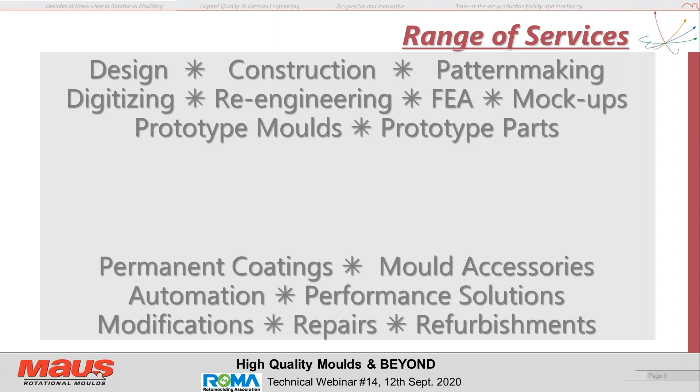But of course, our main focus relies on the actual mold making, and here we have all sorts of possibilities. We make the molds from aluminium, either CNC machined or cast, but also fabricated aluminium sheet or steel sheet, but also galvano molds. So nowadays we can say we can offer all common mold types which are used in rotomolding.

So as said, we have galvano molds, we have the sheet metal molds, we have traditional cast molds, but we also have the so-called fast cast process, which we developed ourselves, and the CNC machined molds. But we can also combine different parts of these in one mold, and then we actually speak of a hybrid mold, where we use different processes to always get the best for the mold.

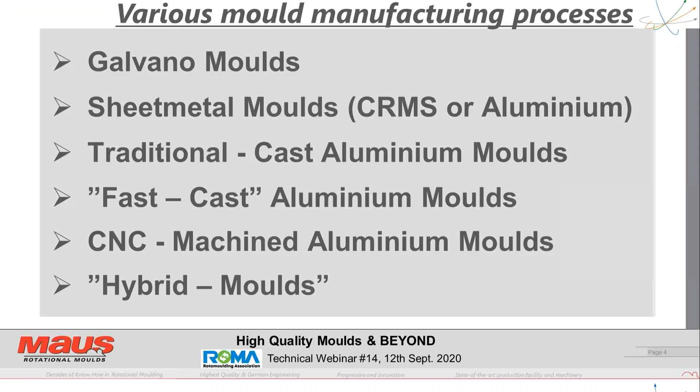It is also quite important to consider the different types of molds we are producing. So we cannot only produce standard serial molds, but we also produce and lay out molds as so-called prototype molds if you would not need as many predicted numbers. But we can also have semi and fully automated molds. Certainly we produce combination molds, robo molds, but also molds that are heated by infrared, or even molds which are heated by an oil jacket. So it's different types of molds.

When we speak of a high quality mold, when we consider the mold as such, there are certain components that almost every rotation mold would feature. Here we see a very old picture of a children's lamp, a famous character in Germany. I think that mold is almost 25 years old, but it still has the basic components.

We do have the mold shells. We do have mold flanges. We do have centerings or dowels for having the right orientation on the flanges. Typically, a mold would feature a mold frame, and you would also find some elements of fastening or clamps to actually keep the mold shells together. And you would have most likely a breather or vent inside the mold.

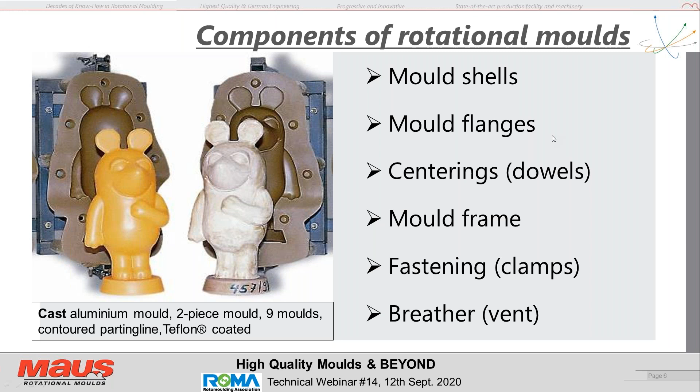So when we look at those things, it is for us very, very important to look at the first part, the mold shells. If the mold shells are not good, or in other words, if you have a bad mold, it's pretty damn hard to produce a good plastic part. So it's most important to look at the mold shells, which would require very good heat transfer, as you want to get the heat in as quickly as possible.

But it also should have even wall thickness to get a good result. You would also want to have the mold shells be very uniform, as every thickening of the mold shell, every non-uniformity on the mold shell, would also give you a different wall thickness on the product.

It is the metal quality which is very important. It's the rigidity - you want to have a mold which is not becoming brittle. You would not like to see stresses being included in the mold shells. You should ask for a certain quality surface finish possibility on the mold shells. Depending on the parts you produce, there should be also a certain accuracy involved in the mold shells, so they should be spot on in terms of the dimensions you want to achieve.

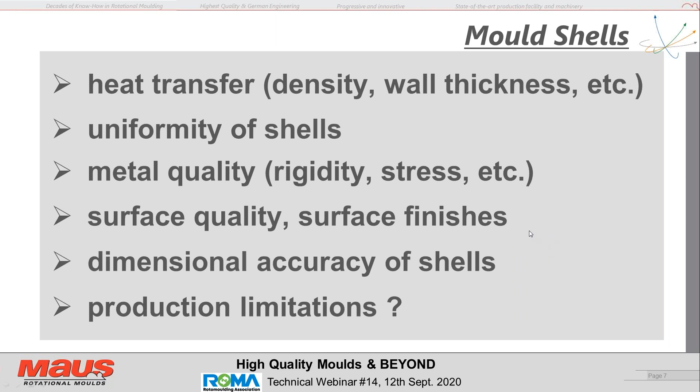But you would also have to consider what limitations there would be in terms of the mold shell production. So those are all questions to find the right mold shells. Let me just introduce a little bit of the different processes we have to actually produce those mold shells.

Starting off with the famous KelchCast process, which was developed especially for rotation molds. What is outstanding here, it is an aluminum casting process, but unlike any other process, it is actually designed for making rotational molds. So what was most important for us is to have a way that we can produce mold shells which have only a 7mm consistent wall thickness. And that is really very outstanding and very important.

Nowadays, you can find many people CNC machining molds with 7mm, but why is it that all cast molds typically are a lot thicker than 7mm? Because it's technically quite difficult to achieve this thin wall thickness. But it's very important to keep the mold as thin as possible to get very quick and good heat conductivity or heat transfer into the mold.

With that process, it's also possible to cast in undercuts. We do not need any demolding drafts. We can have fine surface structures. So as said, it is specially designed for the needs of rotational molds, and that casting process you can only find with us in Germany and our partner Norstar in the US.

accelerating the heat transfer. So you can see the product being highly loaded with structures. You can see in the middle the final product, which is actually gold plated and painted, so quite an ornamental part. Only these fine structures are possible with this KelchCast process.

But since we always need a positive model for the KelchCast process, which takes time and cost, we put significant effort into developing a faster cast process, where we try to skip the positive and negative models and go straight to the casting molds.

So here we are CNC machining our casting molds. Again, the casting molds are formed from sand and ceramics, so we're CNC machining the sand and the ceramic. We skip the positive models, we skip the negatives, but we need more CAD engineering to model up those needed mold shells to then CNC machine the casting molds and do the casting.

So with this process, we have no compromise in quality and accuracy of the casting, and we can speed up processing quite a bit, and at the same time drop the cost for materials.

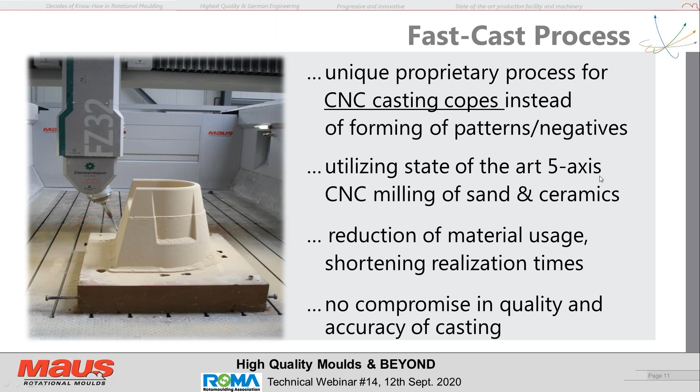But also to get the best features on the molds, we actually have our foundry building humidity controlled. Every melt we produce every day is checked with a computer system to ensure that we always cast in the same environment, but also achieve the highest possible quality of the melt we produce every day.

Plus, we only work with 100% virgin material, so we are not recycling our material, as this would reduce the quality and the longevity of the mold.

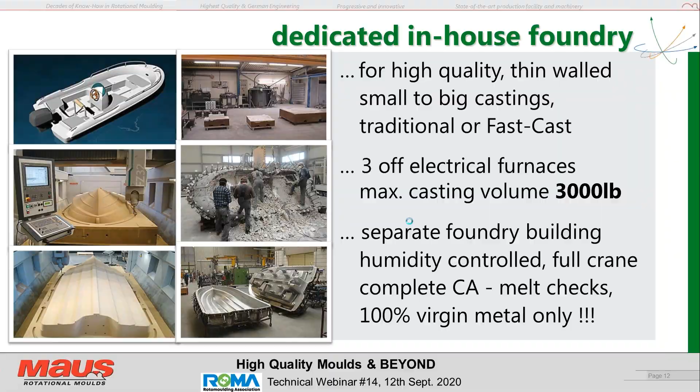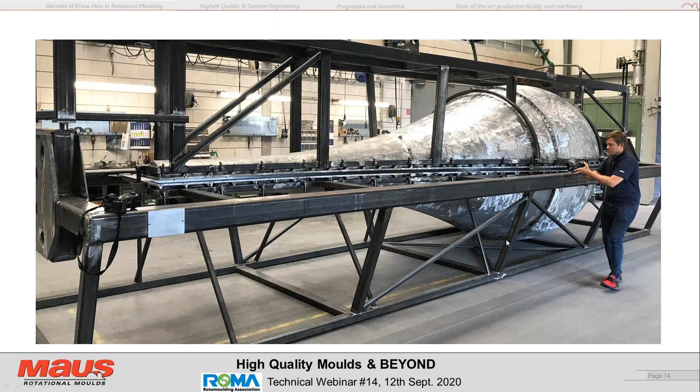We also make CNC machined molds for the mold shells. This is more ideal if we talk about flat or shallow mold shells, as we don't have to cut that much material. There is the limitation that the machine heads need to be able to get into the contours. Other than that, there is not much of a limitation.

This will give you the highest dimensional accuracy if being done right and if the machine heads and cutters are good. But it can give you the best quality.

Just a recycled slide from another presentation to give you some idea.

Nowadays we have 22 CAD/CAM workstations where we do programming. We have 10 high-speed cutting CNC machines with a maximum dimension of 6 meters by 3 meters and 1 meter 60 in Z, so obviously big enough for the largest jobs out there.

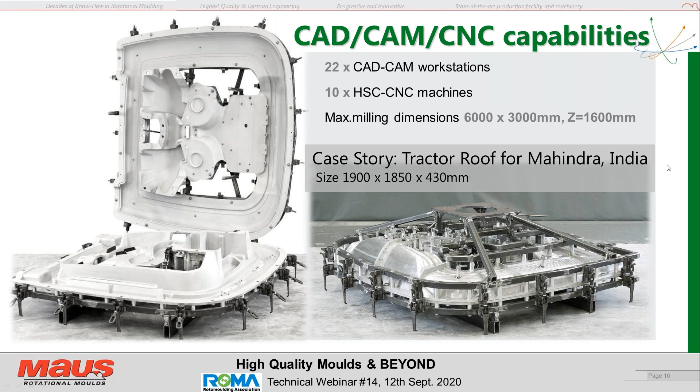As on the example picture you see here, that was a tractor roof for Mahindra, being actually cut from 4 pieces to speed up timing, and that mold was produced in as quick as 5.5 weeks from date of order. So it can be quite a speedy process.

The thing is, you actually have to pay for the full material to then end up with only 700-800 kilos of mold shells. So there's a lot of waste, which makes CNC machining of such deep and large pieces quite costly. Therefore we always think about what is the best way to go: is it CNC machining, is it casting?

Many times you will find a hybrid will give you the best features, as you can CNC machine the flat pieces and cast the deeper pieces and put them together just as you wish. That is a picture of the finalized CNC cut mold.

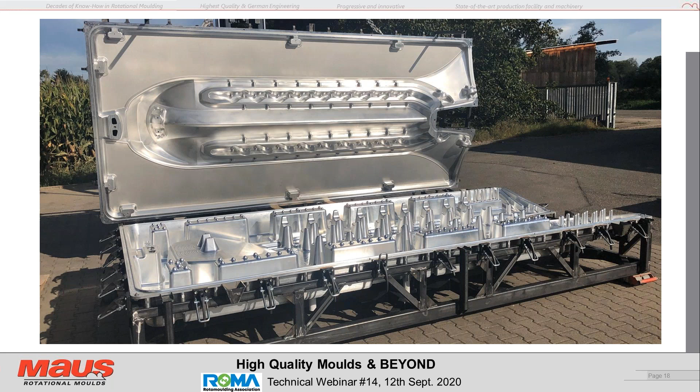So now we talked a little bit about the mold shells. Next on the topic is the mold flanges. Of course it's important to consider the right dimensions and the strength of the flanges, because this is holding the mold together. So you don't want to have this too weak, but you should also not make it too thick, as then you would have a heat sink.

The meeting of the flanges could be machined from the CNC machine or blued together with an engineering sealant. You want to have the mold flanges set up in such a way that you don't have too much offset or distortion.

You need to design the mold flanges in a way that they can be as tight as possible, so you don't have leakages on the mold. In some cases, you could also consider implementing sealing gaskets into the mold flanges to actually avoid material dripping out of the mold, but also to minimize trimming work on the molds.

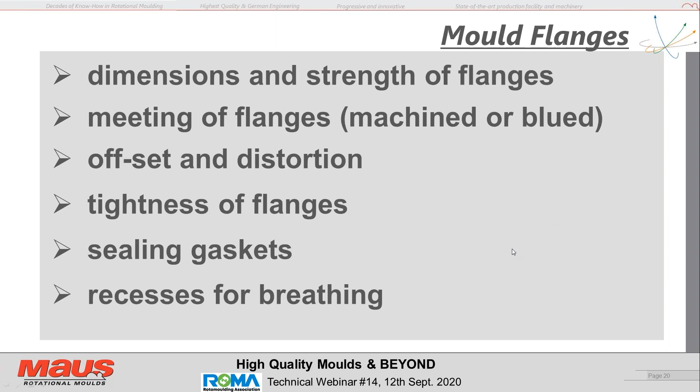On many molds, we actually design in recesses on the flanges to enable the breathing of the air, which is encapsulated between the mold flanges, to the outside, rather than creating bubbles along the parting line on the plastic products. Here's an example of that - a mold where you can nicely see, in this case, a cast-in omega shaped groove on the mold parting line.

That is the groove here, where we could then easily put a silicone gasket in there to have a sealing gasket for the mold, which is helping to have this quite nicely sealed.

That is just a picture from a refurbished mold, but here you can actually see quite nicely what I mean with a recessed flange. So we actually only have 10 millimeters inside the mold surface as a meeting face, but we have machined out or cast out a little recess to the outside.

Therefore we have the clamping force right to the inner side of the mold, versus the outside is nicely opened up, and all the air will stream to the outside. If the mold is heating up and air is expanding, now the air will escape to the outside. So that is helping you to make better products.

We could also have much more complicated so-called dispersed flanges. Typically a flange meets face to face, flat on each other, which is always creating a heat sink, which typically you can see if you cut the product - you will have differences in the wall thicknesses in the areas of the mold flanges.

If I talk about dispersed flanges, then we don't have the flanges meeting face on face. This is actually a liner for the aerospace industry, and they were most critical on having as homogeneous a wall thickness on the product as possible. So we have set off the flanges. You can see this better on the next picture.

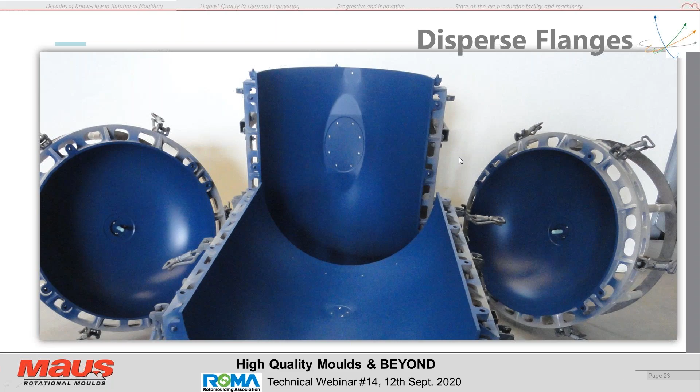If you look at the picture on the right, we don't have the flanges meeting face on face, but they are actually ribbed with little pockets, so the air can stream everywhere. We have no thickenings. We still have a good meeting point on the mold shells, but the flanges are actually separated apart and not creating any heat sinks.

The centering systems on the mold flanges are also quite important, because if you don't have proper centering, over the years in production, the molds will start to grow and distort, and even if you started off with a good meeting face or meeting shells, they could be coming off quite a bit in production.

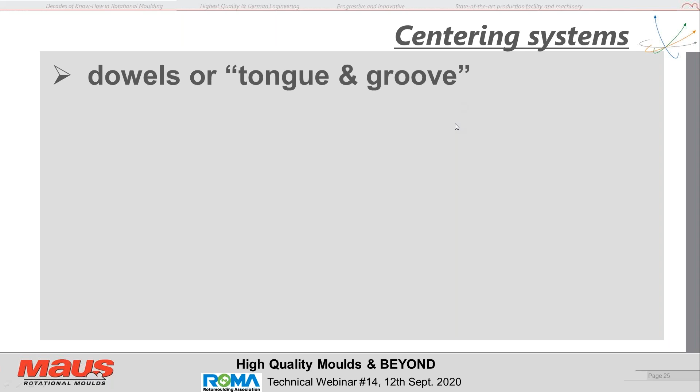So typically when we talk about centering systems, we could have so-called dowels in the mold flanges, or we would find tongue and grooves. It's important how and where you place them, but also how you could fit these systems.

Especially with the dowels, it is a matter of how many dowels you would produce on the molds. Some people tend to have way too few dowels, and this gives you quite some difficulties further down the road in production. But it's also the style of the dowels.

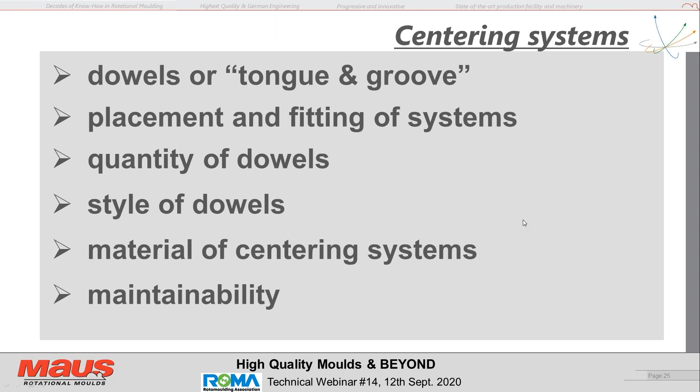Some dowels are just being used from other industries, and they are not really meant to work with the needs of rotation molds. Sometimes it's the material of the centering systems, which I'm not really 100% in agreement with others. But we also need to consider the maintainability on those centering systems, as they are quite important.

When I look into the industries, we still see many molds with tongue and groove. Especially some countries are quite reluctant to move away from tongue and groove.

Here we have one example of a mold we had to refurbish in our shop, where we had to implement a PTFE spacer in between to separate the two products. But you can see on this product quite nicely what is the biggest disadvantage of tongue and groove.

It is quite hard to keep this nice and tidy. There will always be material penetrating into the groove, and with the tongue you actually condense the material, you bake this in. It's very hard to keep this clean and tidy, and if you have material buildup, it is actually degrading the good fitting of the mold.

And then if the operator is trying to clean it and rub this out, many times they actually scratch and hurt the mold with the wrong tools. So in my opinion, tongue and groove should only be used in certain areas where you have a deep slope or something, but not on a mold as a standard item.

In the past, we typically used cast dowels, which are good if you put the mold together and you don't pay attention and you hit it wrong. It's actually aluminium hitting aluminium, so there's not much damage done.

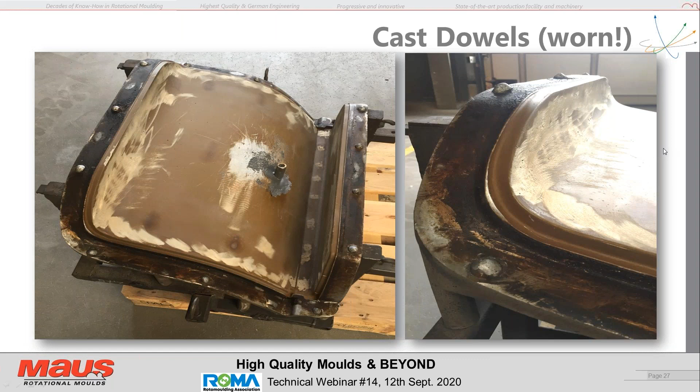But still, as you can see on this product, this was an old fender for Mercedes-Benz, which has already been producing for 20 some years. The dowels, which looked at the beginning like segmented domes, now look more like balls. So there's quite a wear and tear happening on those aluminium dowels.

The funny thing is, sometimes in the industries we actually have customers who want to go for tongue and groove and steel dowels. So to me this is like Hosenträger und Gürtel (belt and suspenders), so not really useful.

At the end of the day, yeah, you need to know what your production team wants to have. Typically for us, when we make the molds, it's nowadays to use steel dowels.

Actually, the steel dowels are produced and designed for rotation molding, so they fit the molds together nicely, they are not too straight. They actually allow you to open the mold with an angle of 30 degrees, but still giving you a very, very tight fit.

If we use those steel dowels, if we go to the foundry, we'll actually cast steel bushes into the mold flanges. So we're not placing these afterwards, but the positions are perfectly set from CAD right into the casting, and into that cast-in steel bush we'll install the steel dowels.

The steel dowels are hardened. They are easy to take out for cleaning the mold flanges. You can flip them from upper side to lower side just as you wish.

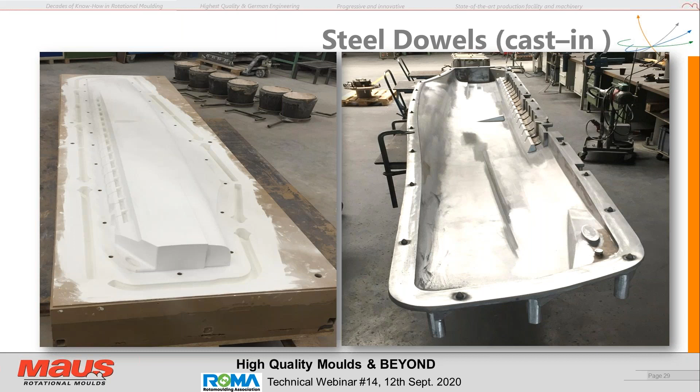But I think what you can also see on this product, and this is quite typical, you should not have too far distances from dowel to dowel to keep the mold in a very tight and good fit together. So typically in our mold production, we would not go beyond 250 millimeters of distance from dowel to dowel. That is the farthest distance we would consider.

The mold frames, also quite important, should assist you for the closing and opening of the mold, but also give you certain features for the handling of the mold. You want to watch the dimensions and weight, as typically the machine or arm will have some limitation, but also in terms of storage. So the mold should have not too much framework, but enough framework. It's a quite sensitive area to get the frame designed in the right way.

The frame also works as the adaptation to the machine, but it should also keep the forces of rotation molding and adopt the forces of the movements. It should protect the molds, whether on the machine or in the storage area, if things would drop. If you have no frame, the mold shell will be directly affected and hurt. If you have a proper mold frame caging up the mold, there is less damage on the mold.

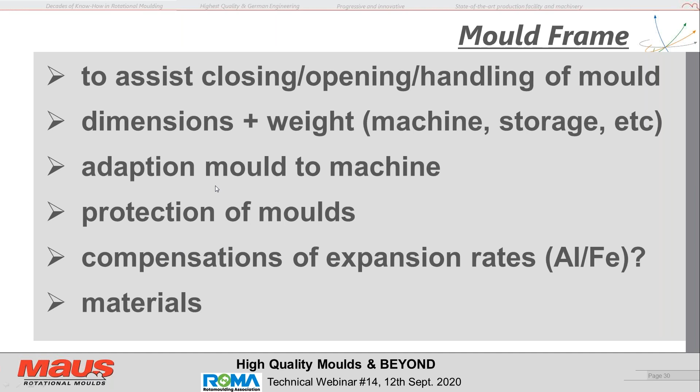Also, the mold frame needs to compensate different expansion rates, especially with aluminium molds. It's not easy to simply bolt a steel frame onto the mold, as the steel expands differently, so it might pull and distort the aluminium shells. There needs to be certain knowledge about how to apply this. It might even be that the mold frame is not made from steel, but also made from aluminium.

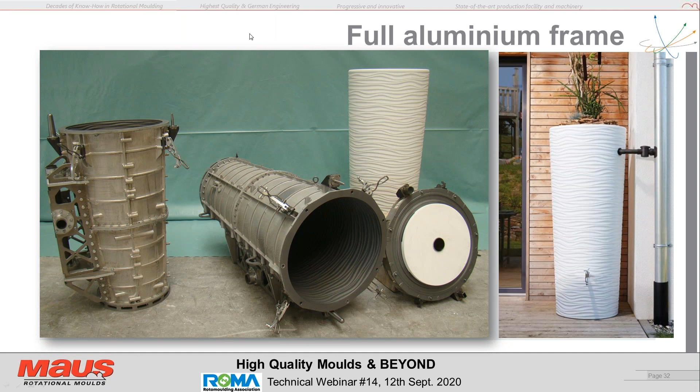To achieve this, as you can see in the middle of that picture, that mold element is produced from two pieces bolted together. In order to not have the mold shell pull away from those very fine detailed contour lines, everything was made from aluminium and bolted together. So we have absolutely zero distortion within the production in rotation molding.

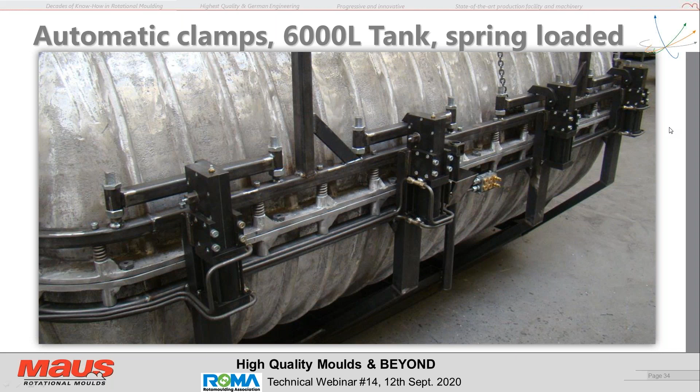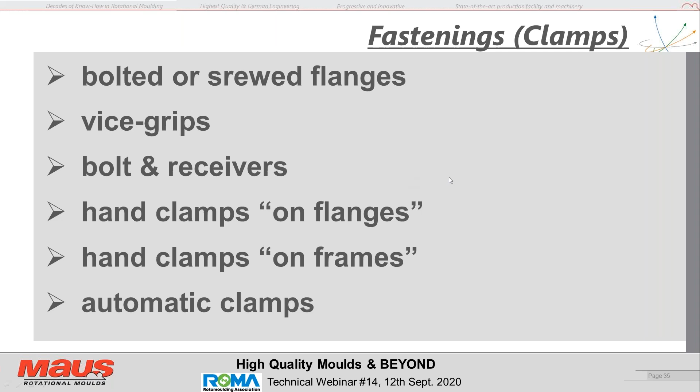That takes me right to the next point, the fastenings on the molds. We could have clamps or even bolts, bolted or screw flanges. You could even work with just vice grips. You could have bolt and receivers, hand clamps right on the flanges, or hand clamps on the mold frames, or we could even see automatic clamps. So there's a wide range to choose from — you just need to find the right elements for the job.

We make products where we use bolt and receiver. As you can see, it's a spring-loaded bolt which you work with an air wrench. If you screw it out, the spring helps it pop out. It's quite noisy for the production team, but it's good because it's probably the narrowest space to actually clamp, so you can get into the narrowest distances on the mold.

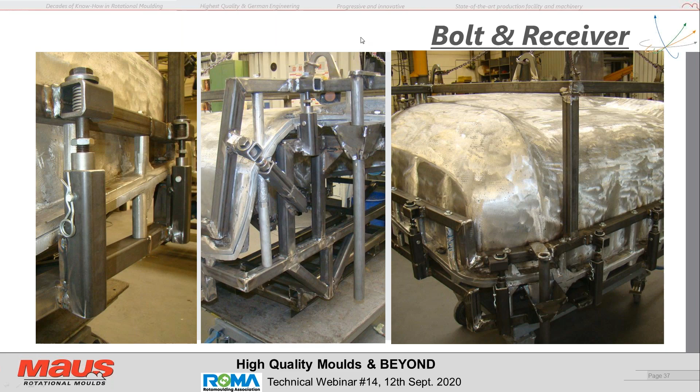We could also have the clamps on so-called prototype molds, where we just have the clamps sitting right on the flanges with almost no frame. But I would only recommend this for prototype molds, because sooner or later in production you would get distortions, and you wouldn't have enough closing pressure.

That is another prototype mold for Porsche water tanks. As you can see, everything is produced quite simply. The frames are put right on the mold shells, trying to make the mold with as little effort as possible.

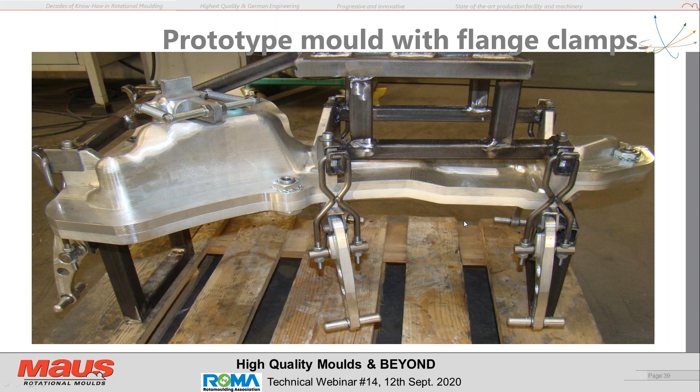We can also have automatic clamps, and hopefully that one goes with the transmission—I'll try, this is a little video clip. As you can see, that mold is fully loaded with big pneumatic clamps to actually close the mold, but it's also using pneumatics for pulling out panels, for pulling pins, for basically doing all the movements needed on the mold.

As you can see, if we apply air, the clamps will actually lock within seconds. So rather than walking around the mold and closing it manually, it just happens by the compressed air applied externally. It's really just seconds. To give you some idea, that mold in total weighs like 1.5 tons, and we only need 6 of those big pneumatic clamps.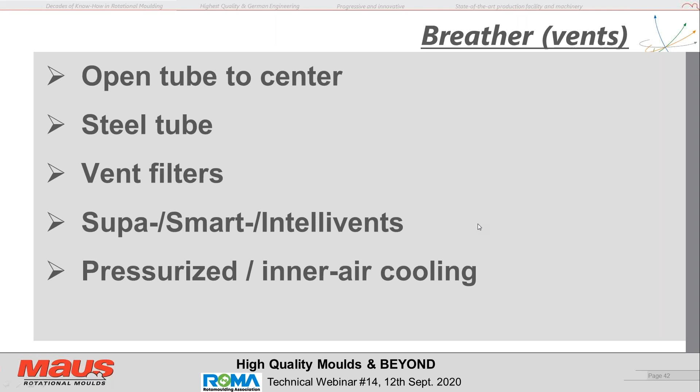We have the family of the Supa, Smart, or Intellivents from Laplace Technica in New Zealand. We could also consider pressurized production or inner air cooling for the breathers.

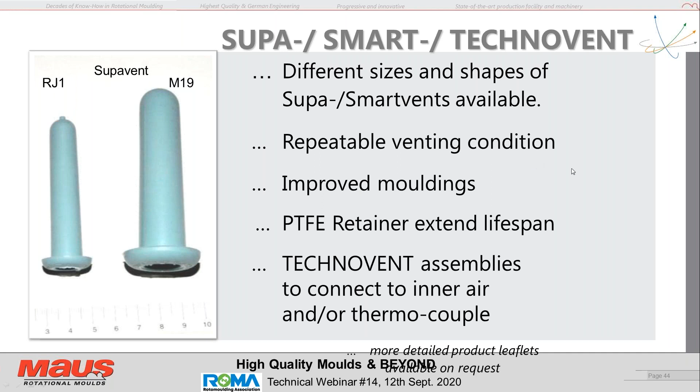We also have the family of the Supa and Smart Technovents and Intellivents. These are silicone vent tubes which, depending on how they are installed, can see quite some production numbers before having to be replaced. We would actually recommend installing them inside a PTFE sleeve or retainer, as then the lifespan is greatly increased. Again, the idea is to have venting that gives you multiple products with very similar venting properties, unlike a common system where every vent, every cycle, has different venting features.

That image shows a rather large hybrid mold. On the right picture you see, for example, a sheet fabricated lower part on that tank, versus the upper lid which is a fast cast lid. But what's important here, to keep that production line at a good pace, we have implemented for the molder an inner air cooling system.

As you can see on the top, where the guy stands, you can see here, or here, some inner cooling systems where we can utilize a venturi to blow inside the big and open vent tube, trying to fully exchange the air volume in cooling. In this way, you keep the product longer against the mold wall, which reduces warpage, but you can also reduce cooling time easily by 10, 15, 20%. It's a very easy system—all that it requires is enough air pressure from your machine.

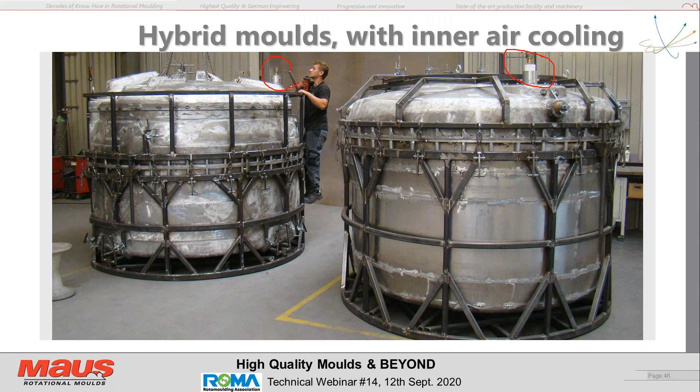Just slide it in. When we think about the aluminum shells, and this is rather new to us, we have in the last few years invested quite heavily in new welding technologies. That is a CAD picture of a cooler box.

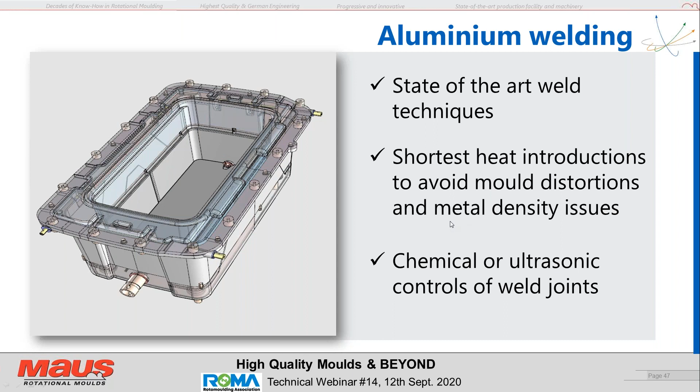Nowadays, with our state-of-the-art welding technologies, where we try to implement the shortest heat introduction as possible to the areas where we want to weld, we are not creating any distortions in the metal, nor would we change the density on the weld lines of those areas, and we can actually do chemical or ultrasonic controls of the produced weld joints to make sure these are absolutely sealed.

So what this would mean on a product, again, this is an example of a cooler box. You can see in this product that it's a typical cooler box. It's a very easy outer shell, but it's also a core section forming a twin wall product. Where we have put the areas together, we have no flanges, so there is no doubling of the wall thickness. It's not creating any heat pockets or heat sinks, but it's just the wall thickness which we put together and weld together.

Outside, as you can see here, it is just tigged, little areas being tigged, or the same happening on the inside, on the core section. So little TIG welds, but to the inside it would then be seamlessly and fully welded. By this we actually achieve a uniform wall thickness without any heat sinks, and also a very even density on the metal.

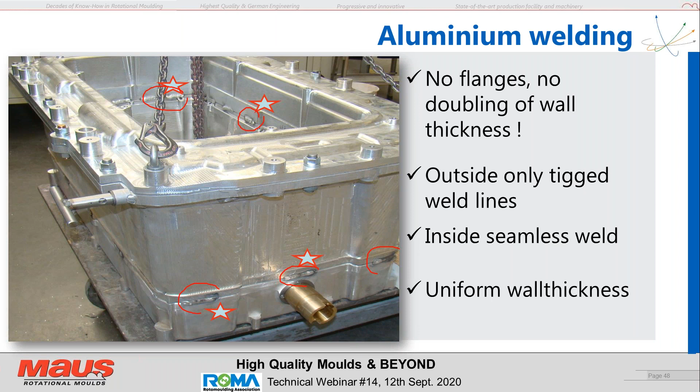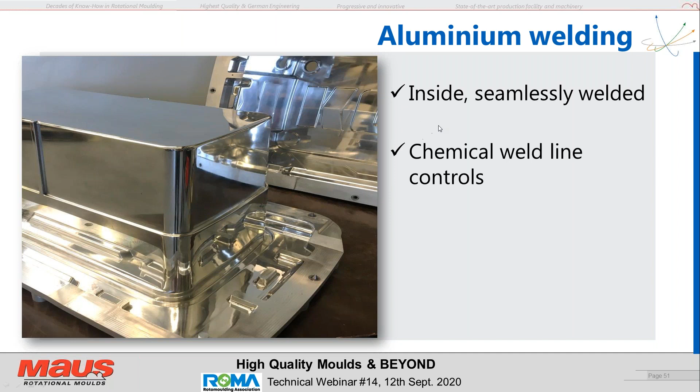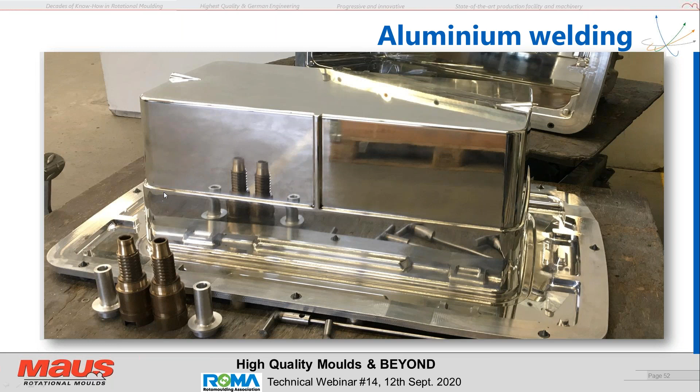So you will not be able to tell where it was welded, as with that new welding technology, you can put these elements together without any hairlines. It's invisible. It's not very easy to do, but we are actually quite happy that nowadays we are able to put these pieces together. Again, you would see no differences where those pieces have been welded together.

Here again, you can see nicely on this area, if I highlight this, you can see from the outside where it was welded, but you don't see it on the inside. So that is giving us new chances, where before we said trying to stay away from patchwork mold shells, but with this new welding technology, it actually is an option to do such patchwork molds.

So that was just a brief overview on the different mold elements. I hope there was some useful information in for you. The next topic would be to give you some examples on mold automation, mold gadgets we can actually offer, or mold accessories.

Again, we have seen a little bit of this already, the mold automation. We have developed all those pneumatic cylinders, especially for rotomolding. They can pull, push, or close, whatever movement is needed. We nowadays can achieve this with pneumatic cylinders.

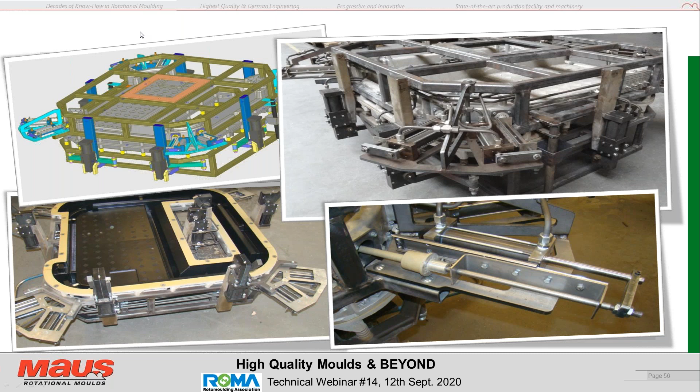This is an example of a mobile toilet pallet, where you can see the mold is not only being closed with pneumatic clamps, but also all pull pins being installed on pneumatics. So the operator would only have a little tableau with elements where he applies the air, and the air will do all movements. Good thing about this is you don't need physical force, but also the pneumatic cylinder will do the movements every time in the same manner, so there cannot be any damages.

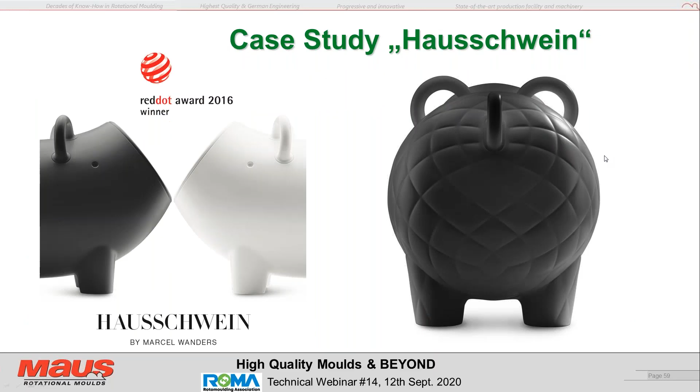A little case study on a product, a little furniture piece.

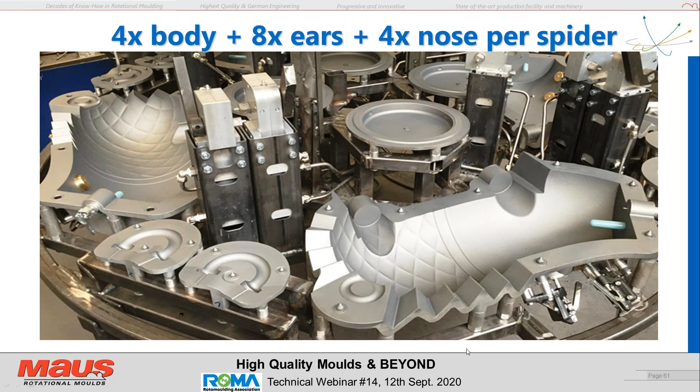Again, you can see with those pneumatic clamps, it is possible to really condense and compress the molds next to each other. Of course, you always have to watch out for the air volume or air streams around the mold, so it should never be too tight, and should not always be on the same levels. With these molds, you can see these are C30 coated, which gives a satin matte finish on the product.

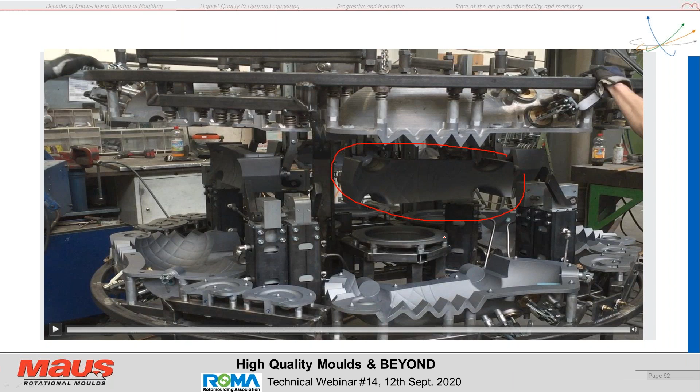Again, a little movie clip, and perhaps it'll show when we lift up the product with a crane, you will then actually grab the belly pieces. So the belly pieces are only closed if the mold is put together, but if the mold opens up, you can see that this belly piece is hanging loose below the upper mold and the lower mold. And here is where they can then just easily pull away the plastic product.

We do have automatic spiders for singular molds, or in this case, 2 singular molds which are automatically clamped together in a somewhat baby spider. It's a 2 mold spider, but these are also produced in such a way that we can easily exchange them and put different tanks in there. But it's not only the closing - it's also the pins and threads which are being produced by automation.

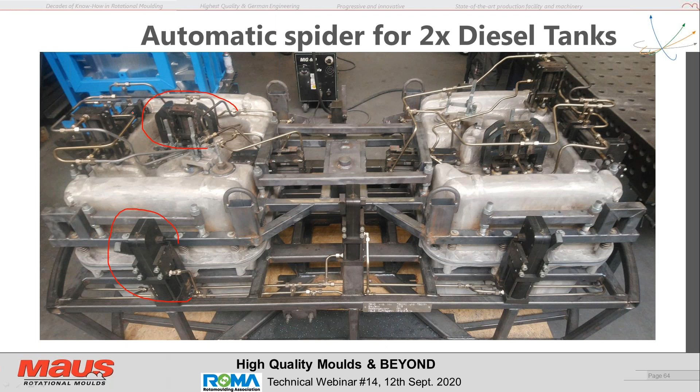You can see again the clamps for closing, but you see there's a certain amount of cylinders involved for actually retracting certain elements on the molds.

Yeah, this is in reality - there could be, for example, if we try to see this, you can see it is just being produced by the compressed air from outside the machine, which you can use for opening the clamps or actually closing those clamps. And besides the clamps, we then also use the air for opening cylinders, retractable pins, whatever. So it's a fully automated mold.

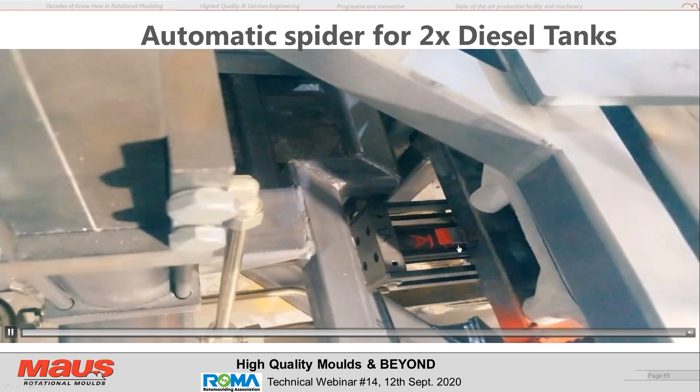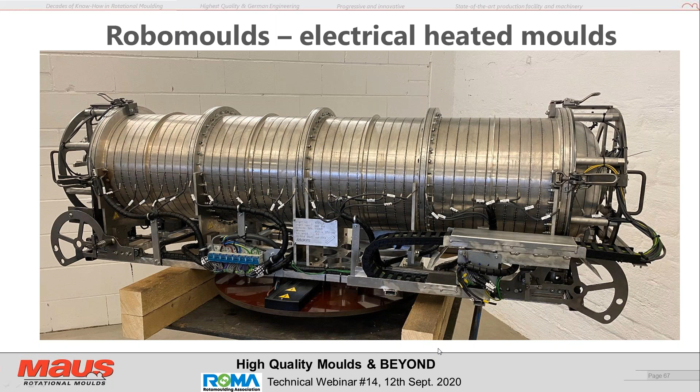Yeah, well, that's more like for automated production, where here the robot would take the full molding. It would actually take the material, mold, form the product, demold the product, drop the molded product on the belt. So it's completely labor-free.

To talk a little bit about the possible gadgets we have produced, one is the so-called Rotocooler, which we had developed together with Queen's University. This is a device where we can actually introduce inner water cooling inside the product. The inner water cooling is especially good for rather large products, as it helps to exchange the hot air inside the product, but it's also with the water mist we introduce, takes all the heat energy and transports it out through the breather. So it's a very quick cooling method, but it also creates a little pressure inside the product.

And also being able to cool from the outside as well as from the inside. This is a really good way to minimize distortion on the product.

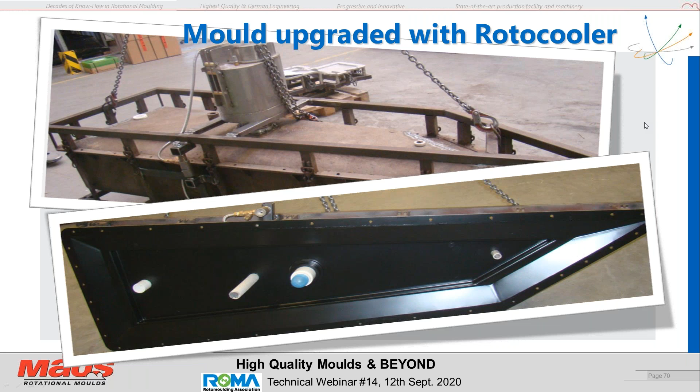Here we see the Rotocooler installed on a mold, so on the lower side, we see the picture with a blue silicone cap. This is where the Rotocooler will actually introduce a lance and then produce a water air mist inside the product to help get the heat out.

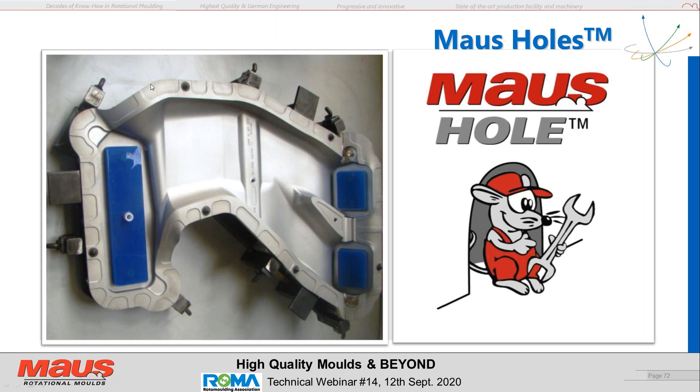We also have drop boxes, or what we call the Maus Holes, which we had invented. This is silicone material which we can cast to any required shape, implement into the mold, and this will actually form and shape openings in the product, similar to PTFE or PEEK, but with a big benefit of being a flexible material and a lot cheaper to produce.

Here in this particular case, it is an air intake for a tractor. As you can see on the picture on the left, where we see the mold carrying different surface coatings, you see the blue elements. These are all little silicone studs being stuck right into the mold wall. To the right, you see the product produced with this mold, so it has all the openings already directly formed in.

Another example of an engineered mold. This is a tile, a roof tile for the UK, where we need to find a way to actually hold a little mesh material in the product, to form a little net to avoid insects getting into the roof tile.

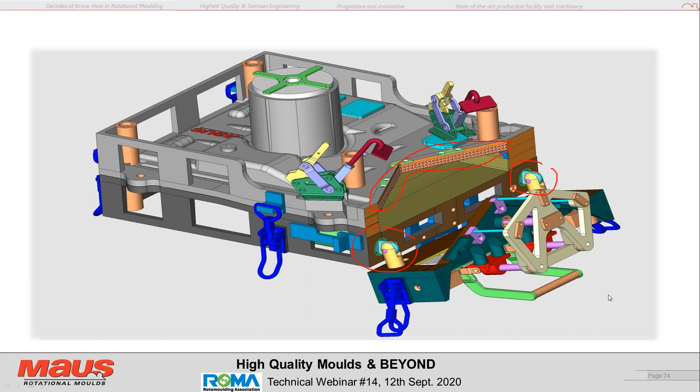So you can see on the mold engineering we have little hidden hinges and slides. We have this area where we can place the mesh material with clamps which will pull it in place, but we also have certain elements formed with silicone to create an opening where needed. You can see here that we have silicone on the top opening, but we also have silicone on the front faces where there is an opening, and still we have that mesh area which is embedded into the mold. So it's not allowing the insects to go in.

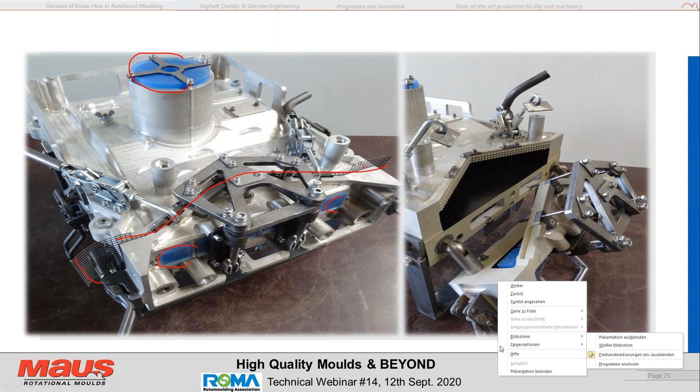Yeah, then we also have permanent mold coatings. I should not do a presentation without naming permanent mold coatings. We nowadays have developed 12 different permanent coatings. They all have a certain job to do. Basically all of them will permanently release, but some will enhance the product, some will create a brighter look on the product, etc., with our permanent mold coatings, which are known to the industry as PMC coatings.

We also have our partner Reinhardt Technique in India, which is able to carry out the coatings there for you in India. So that is cutting traveling hours and costs of the products and molds.

Why should you use or consider mold coatings? They will release the product, they will give you greater quality of the product, they will reduce your maintenance work, they will reduce scrap rates, the product will be nicer, it will be more repeatable as you don't have to mess with semi-permanent release agents. It is also helping you cut down costs, as a permanent coating will be installed one time versus a semi-permanent release coating which you have to redo multiple times, which is also creating scrap pieces, costing you the liquids of the release coating, but it also steals away quite many cycles in production.

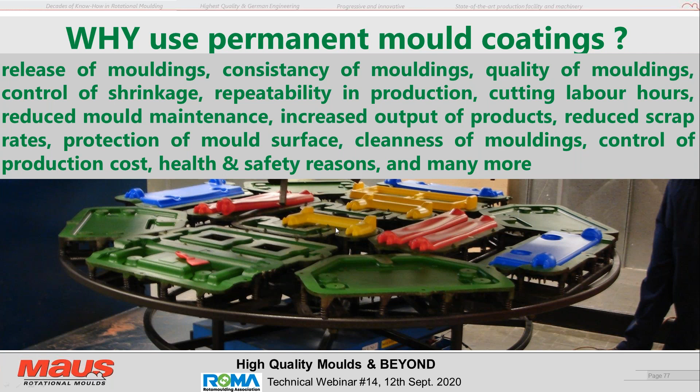This is our latest addition to the coatings, what we call the Edelweiss coating. Mainly it was designed for the flanges, and as you can see on the picture, the mold flanges had been coated with the Edelweiss. The Edelweiss is like a ceramic coating, so it's very, very tough, very hard, but also very smooth, very easy to clean off. Plus it is quite strongly releasing, so material will not tend to stick there.

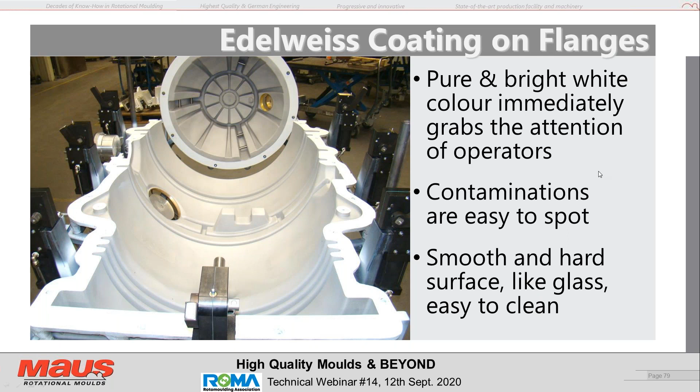The Edelweiss coating on a larger inspection chamber. Also, you see the inspection chamber carried out here with pneumatic clamps. What also helps a lot, as simple as it is, is that the white coating really helps the operators focus on any contamination on the mold flanges, as it really stands out if there is some contamination. The white coating shows this, you clean it out and you're ready to go with the next cycle. And while it is so hard and smooth as glass, it's very easy to clean the molds.

Lately, we also found that the Edelweiss coating will give good molding properties when we coat the molding surfaces. Again, it's very nice to spot any contaminations in the mold, so you're always producing clean and nice products. It gives a very nice glossy finish on the product. What is very important to many of our customers is that the coating is actually food-proof and certified by health industries. Yeah, that's the Edelweiss coating.

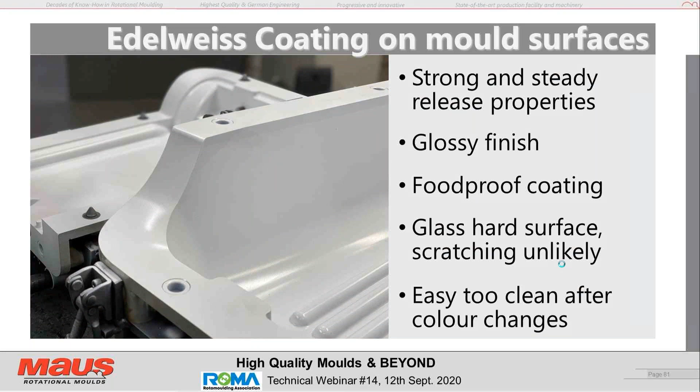Many times we think about what we call intelligent mold conceptions. It's not that we just need to produce a mold with good mold shells and good flanges, but we also should always think about the handling of the mold, of the guys that have to work with the mold, but also how we can demold the product. So it's a full story. What does the mold have to carry out? How would the guys have to work with it?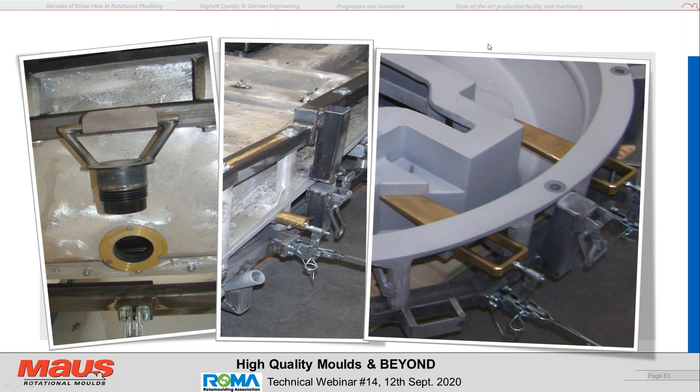In some cases, it can be easy hangers for any inserts or pull pins, so that the guys don't have to pull these on a workbench and mix them up. So very easy systems. Or we would have slides where we can slide out molds and pull away without surface areas being hit and damaged.

It could be auto break systems where if you use a hoist on this mold and apply it to the 3 hoist points, lifting the mold shell with the hoist will actually simultaneously break away the molds at 3 points, rather than having to use a crowbar where you'd always have a one-time spot force. This is doing the breaking off at 3 points at the same time.

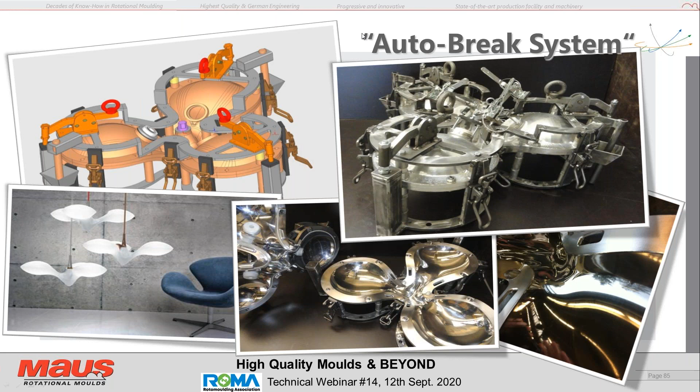Here we see a mold where when we open it, they can easily pull or tilt away one mold side, but this is then held with spring stoppers, so it's not falling all the way to the mold floor, but just being pulled away slightly.

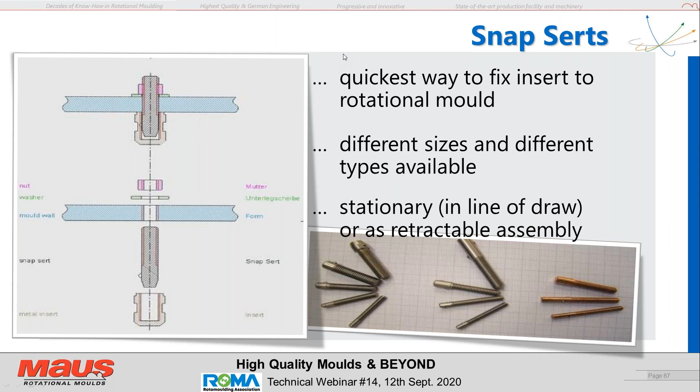In terms of mold accessories, we carry snapserts, which you can use for holding inserts in a very quick routine, so you just stick them on. They come in different sizes, but also different features, so they could be standard snapserts, but also double snapserts, so you can use inserts with wider tolerances, or also hot serts, which are meant to actually adopt much more heat, so you get a lot of heat on the insert, which ultimately works into a lot of material melting around the needed insert.

We have offered and produced certain Venturi systems, which are probably the most efficient Venturis you will find in our industry, as they are designed for rotomolding, so they're easy to adjust. And if you use them right, those Venturis, and if you think about baffle plates where you can bend the airstream, this would be a very efficient way to heat up mold elements.

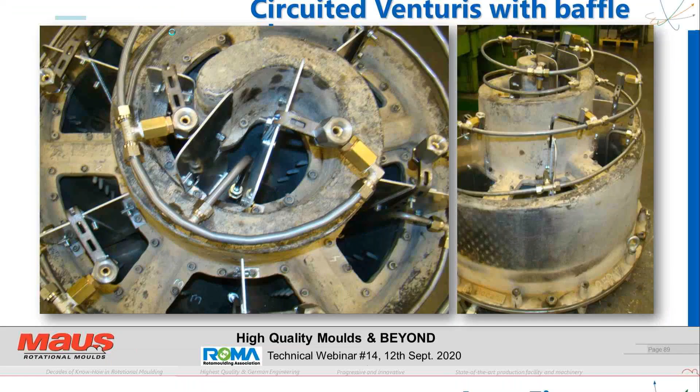Here are some more shocking pictures of sometimes the molds look like when we get them back. In the picture on the lower side, you see actually there are a lot of clamps missing. Guys have tried to open the molds, not really educated, but with crowbars, they have completely distorted the parting lines.

In your operation, you need to find ways to frequently look at the molds and try to maintain them in a good shape. If you have molds to work with like this, I think it's not really a good production.

So what we recommend is to do the mold maintenance frequently and in time, and ideally have maintenance plans for all the different molds. At least check the tightness of the mold flanges, that the fasteners or screws are where they need to be. Otherwise you have leakages, and that's the worst thing to happen.

Control the overall conditions. You would not want to produce with molds where you have half a plastic part sticking from the outside of the mold. This is way too slow, messing up your complete processes. Try to have standards so you don't have to have different elements for all molds, but have standard stock items.

And what is also really important, trying to listen to the crew that have to work with the molds. They typically know best what needs to be done at various molds, or where there is potential to optimize or even upgrade the molds.

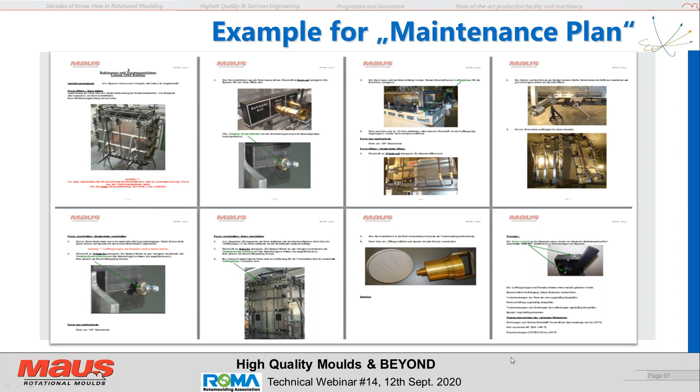That is like a very easy maintenance plan could look like. Some pictures for the operators, so they know what elements they have to maintain and look after. It might be a greasing plan for clamps, or cleaning the parting lines, or maybe just a plan that every cycle they need to look after the venting. If you have this in place, production can run a lot smoother.

Or if you have complicated molds, we recommend having operating instructions, so the guys that may have never worked with such a mold know in what sequence they have to open the mold, and in what sequence they have to load and close it. That is easy stuff to produce, but it can save you a fortune in production.

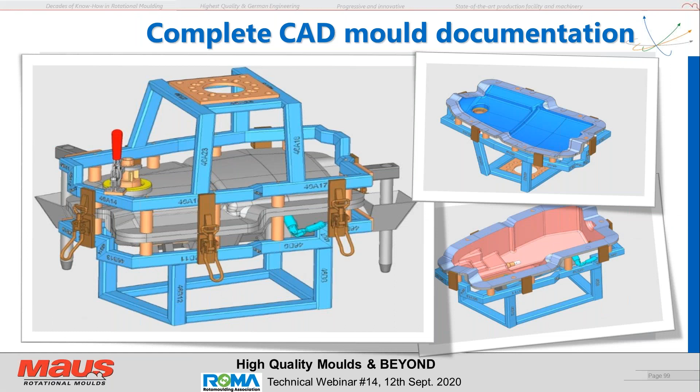Ideally, you would have a complete CAD model of the molds. With the complete CAD model, you can easily run off spare or attachment part lists, so you can keep this all in good order.

The same is with mold repairs. Don't wait too long. If you have molds with some issues, have them repaired in time. Typical mold repairs could be surface injuries, or there could be cracks in the molds. If you wait too long, a crack will carry on, it will get bigger, and it will adopt plastic in the crack. If you have a crack somewhere in the mold or frame, fix it as soon as it pops up. The mold parting line should always be repaired as soon as you have any issues there.

Same for mounting blades. Sometimes we see guys where the mounting blade is held by just one little weld line still on the mold, but they keep on running. That is a potential danger to operators, but also to production. So all those repairs should always be carried out and attacked as soon as they are made known or found.

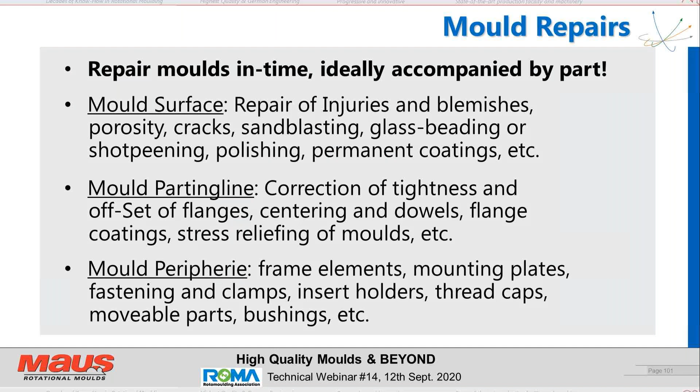The upgrading of molds - again, we recommend doing this assessment frequently. Don't just buy a mold and then predict that mold, bought off a good producer, is now going to produce the same thing for 20 years. Now and then there might be new techniques, new reasons for a mold to be upgraded.

It could reduce your scrap rates. Sometimes you could improve the mold in terms of better wall thickness distribution, or you could see what difficulties there are in production - maybe the handling can be optimized, or the post-molding operations could be minimized or optimized. Sometimes the product could be better if you do some upgrades, or the production numbers can be bigger. So there are all sorts of different ideas.

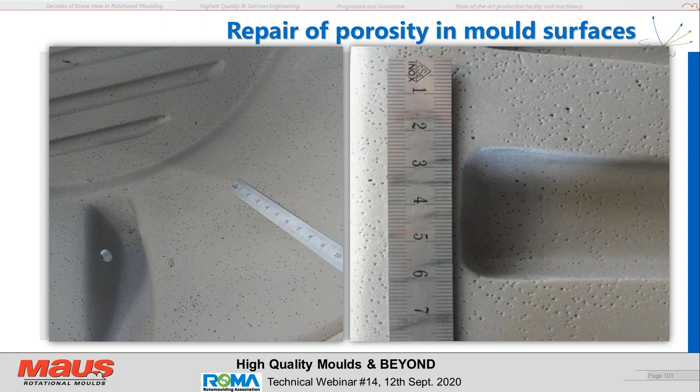That is an example of upgrading or repair of a mold - a very bad casting mold which a customer of ours brought to us, a big boat mold in Norway, full of porosity. They basically could not produce with the mold. They had to spend many hours per product to dress up the product, to rub out all those porosity pits, and they found it was money well spent upgrading, healing the porosity with our BMC C10 coating.

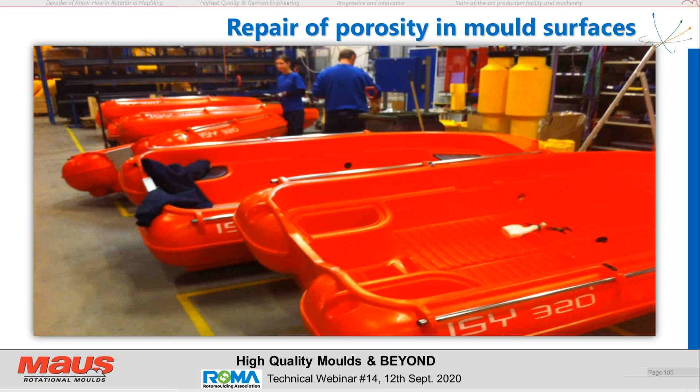So we can apply this, rub it down, apply certain layers, and then the porosity will be closed. And now they can produce with this mold without having to spend a lot of time on extra finishing of the product.

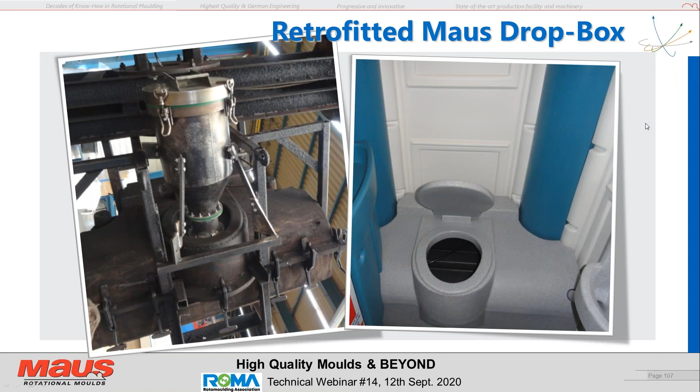Or you can have improvements on the wall thickness distribution. You can easily apply so-called profit pins on molds. If you find areas where you have too little wall thickness, just TIG weld some pins in there to rip up the air stream, create more surface area, and this will easily adopt more material in these areas. Or work with venturis, or rather than dropping powder in manually, you could retrofit drop boxes to molds. So there can always be better things being done with a mold.

Even if you start out with a very easy shape mold, it should not be frozen - like my computer was. It always needs to be uplifted and uplifted. You can always do better.

And especially in nowadays times, we see that many people invest in upgrading their mold, where production is still slow with the COVID pandemic everywhere and few new jobs coming on, but people are actually very keen to improve their current production as good as can be.

And that was basically my slides which I had prepared. I had a nice coffee break in between waiting for my computer, and I hope you enjoyed that little webinar and there were some interesting things in for you.